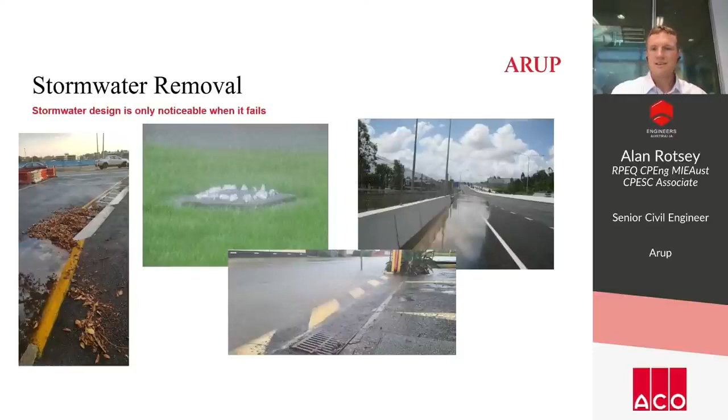You can design for your set storm, and then if the storm gets bigger than that, it'll fail. You can have additional blockage. So just because something looks broken doesn't mean it's not doing exactly what it's meant to do. Some things are unfortunately meant to flood.

So the traditional way of looking at stormwater, if we take it back to basics, we are looking to get water away from where it's currently falling, be that a road or a pedestrian area. So in a wide open space on a new road, we can just let that water sheet flow over the edge and away. We don't need to think about it any more than that. As areas get more built up and urbanized, you may need to capture that water as it flows off the road in a grass swale. That's the simplest and most basic form of getting drainage away after it's landed.

As areas get more constrained beyond that, you might need to put a hard-lined swale in that resists the erosion that might happen, lets you concentrate the stormwater and move it away more quickly. There's a number of other ways you can get drainage away, but that is the basic, cheapest, simplest way to do it. And then when you move on beyond that, because things are more urbanized, you want to put a footpath next to the road, you need that next traditional drainage, pits and pipes.

These are used everywhere in urban spaces where space is at more of a premium. And in their basic form, you put a kerb and channel at the edge of the road, you let the flow go across to the channel and build up. Once there's too much flow at the edge of the channel, we put a pit in and let it flow into a pipe and away underground. And that works just fine.

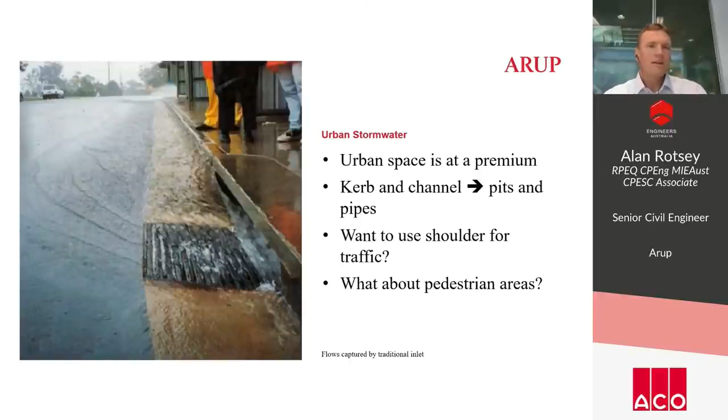So the solution to that is continuous capture drainage. There are a few different ways this can happen. You can use a trench drain, which is what it says on the tin - it's a trench in the surface of the land with a grate over it. The water can go into that as soon as it gets there and flows away.

Slot drains in the middle there - a pipe just below the surface with a vertical slot to let the flow go into it. Again, minimizes flow width on the surface and the flow can get away. Or a combined kerb drainage, which is a hollow curb with holes in it - water can get into the curb and disappear that way. So these are all similar but different in what they do.

They all have their benefits and their limitations. The slot in a slot drain can limit the inflow of water into the pipe - it's quite easy for that to get blocked. Grated trench drains, I think everyone is familiar with.

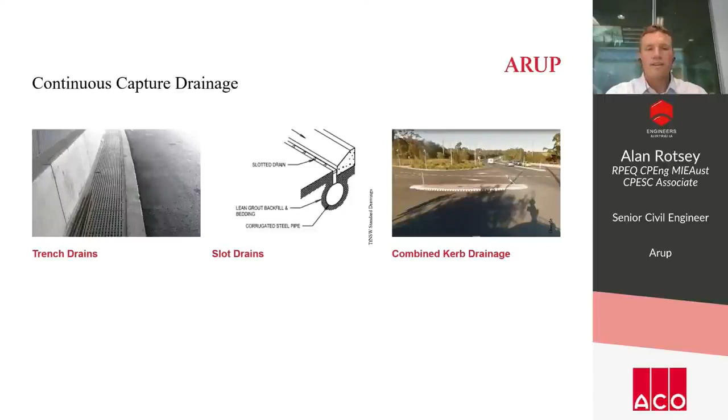But if we put these in poorly designed, poorly thought out scenarios, we run the risk of them not operating effectively. So we have pros and cons. As I alluded to a moment ago, there's little to no flow width on the surface using them. We don't need to excavate much because they are very shallow, and they're very unobtrusive when well incorporated with the overall design.

So they can be used all over the place, but they do have issues. The principal one is that they can fill up with silt, which means they need a lot more maintenance. And if they're not maintained, then they don't work - they may as well not be there. So we need to design to minimize that maintenance need.

Water - the first rule of drainage is that it flows downhill. So you still need to get the water to flow downhill. If you put a trench on with zero grade, water will flow in and it will build up and flow away, but it will do it so slowly that it's going to fill up with silt. So you've shot yourself in the foot.

The grates above trench drains can be prone to blockage, which will limit their capture rate. And that's more of an issue as you get to pedestrian areas - you need to let flows in, but not have high heels get stuck in the grating. Then you have a grate that's small enough to stop the high heels, which means it will stop and capture more litter and debris, which will block the grate.

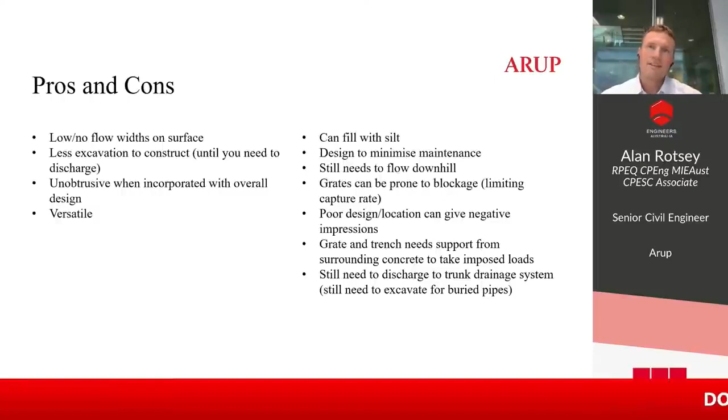Obviously, if you put them in the wrong location, they can give a negative impression. Then we go, what is the purpose of this? What were they thinking?

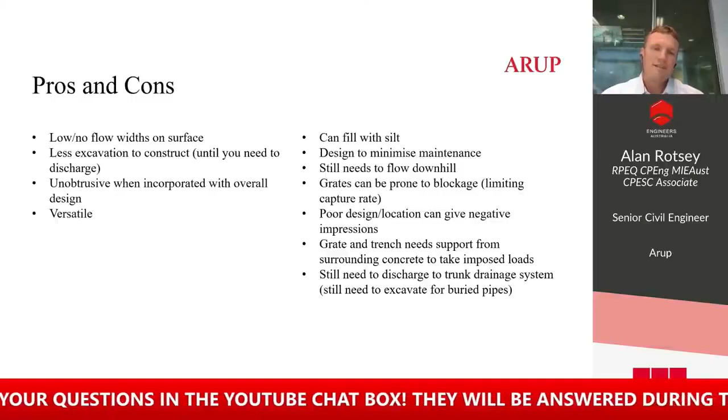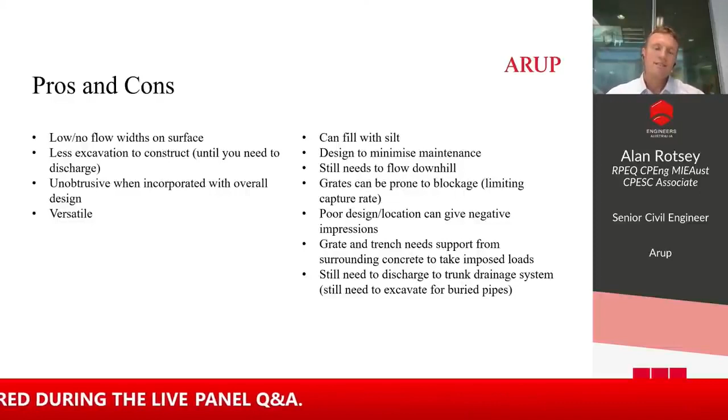The grate and trench obviously need support as well, so you need to make sure it's properly incorporated and constructed. And lastly, although we said in the pros they need less excavation, eventually you still need to get the water that's in them out and into a buried pipe somewhere. It doesn't just magically disappear - you've got to get that away.

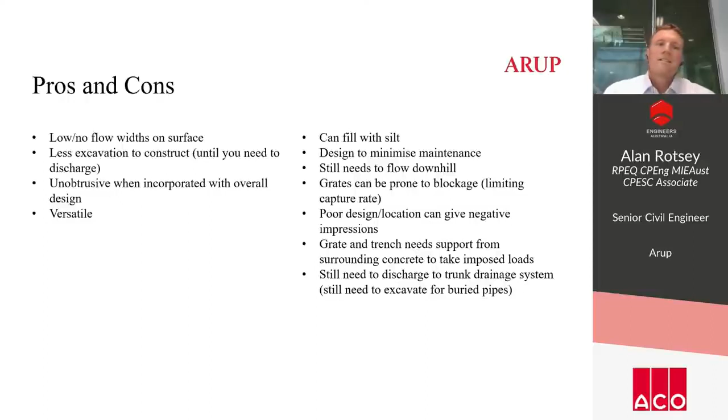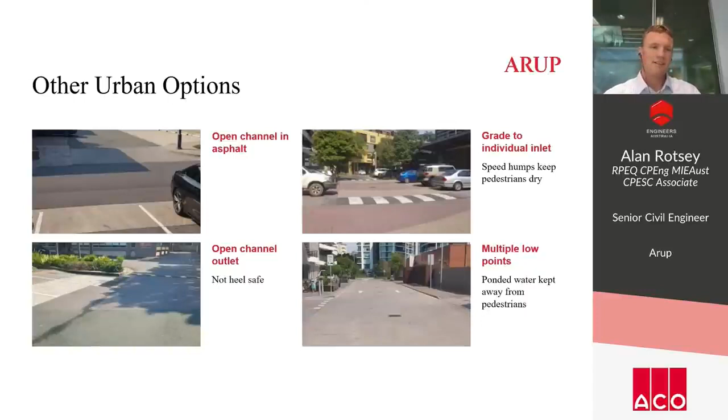An open channel is great, but you still need to get the water away. That's a very un-heel-safe grate - it's huge, but that's an area prone to flooding, so they needed a big inlet to get the water away.

As I said, for all of those, you need to get water into an area and stop it, allow it to pond. If it doesn't pond, it will struggle to get into the grating. So in pedestrian areas, check your grating capacity, especially allowing for blockage and the surface gradient. If you design something with no gradient, at 0, it's okay in theory - it'll build up and flow away. But construction tolerance means you'll end up with ponds everywhere, as you get little depressions - they can't build a perfectly flat surface, and even if they managed it, the land will settle. So adding a small amount of crossfall will let the water get away without ponding.

So ponding depth, as I mentioned, it's good for capture. The more the water will pond up, it'll increase the amount of flow that can get into any inlet. But you can only really allow that to happen away from where pedestrians are going to be walking.

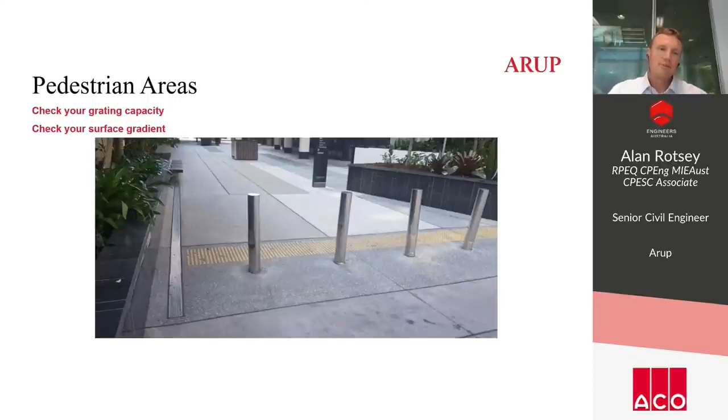We can include a blockage factor, which allows for debris getting in. We can also allow for blockage caused by the actual grate itself. So a heel-safe grate can close your opening up by 60 to 70% from just a basic hole. And we can use that. Blockage factors - generally we use 50% for sag inlets, but if there is a lot of debris around, when you consider it there's a higher chance things will block, then you may need to use more than 50%.

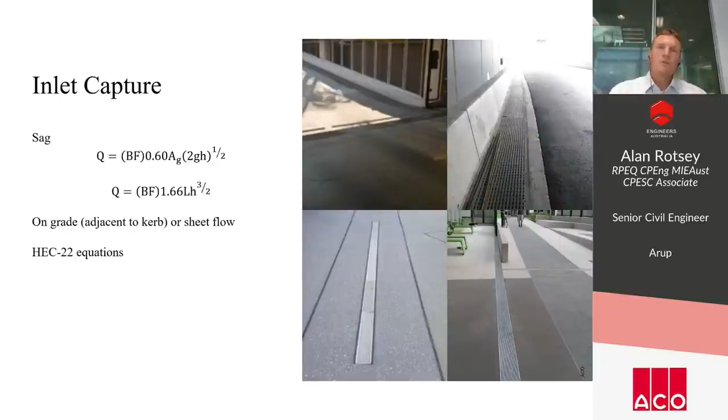The flow in the channel is non-uniform, because as you go further down the channel, more flow will get into it. But to do a quick check - is my trench going to work, or do I need to step back and have another think - we can use Manning's open channel equation to work out how quickly the water is flowing. If you use Manning's open channel for a flat trench, on grade at 0, velocity will be 0, it won't work. That is the limitation of the equation.

Obviously the water will flow away, but you'll need to work out how to get rid of the sediment that it leaves behind. A better option is to slope the trench, either by sloping the ground or adjusting the invert of the trench as you go along it. That will give you some gradient, which will increase the velocity and, again, help move the sediment, get rid of it.

There is obviously an issue with that. The top of that trench had no flow, means no hydraulic radius, no velocity. So the sediment will build up. Once the sediment starts to settle out, it will increase the roughness, which will slow the flow more, which will help more sediment settle - it's a bit of a vicious cycle.

The solution to that, if you can do it, and here's where you need to think more carefully about how you're designing - is there a way you can have some water build up on the surface before you start your trench? Or is there a way you can put water into the trench below ground from a roof water downpipe, for example, to add that kick right at the start so that you have sufficient velocity in a small storm at the start of your trench that the sediment won't settle out.

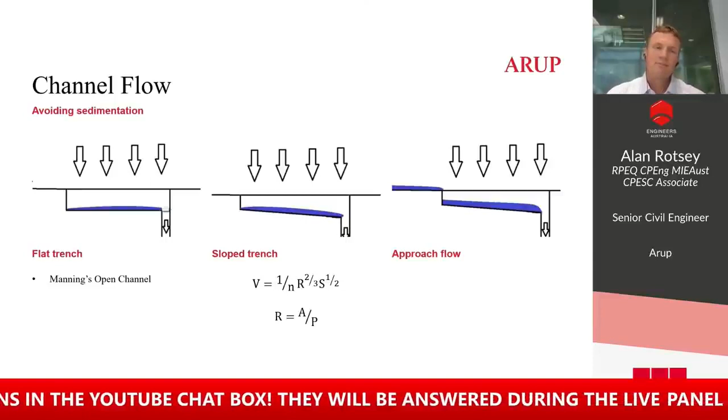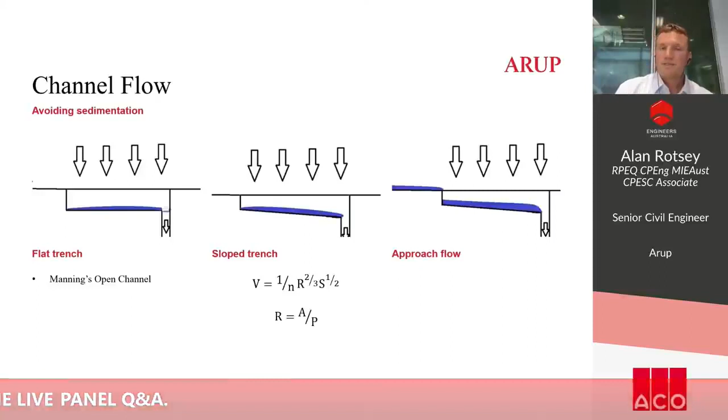Beyond that, there are other options you can think about to improve velocities and stop sediment settling. Don't pick the widest trench possible and keep it shallow. If you pick a deeper, narrower trench, the water will flow more quickly. Obviously, when you get to a certain size, you will need a bigger trench.

Directing overland flow - if we can get overland flow into the start of the trench, even if the flow is bad and it's going to cause a problem right at the start, the benefit to the client might be that you won't need to get out and dig dirt from the trench every time it rains, or before every time it rains, which is more of an issue.

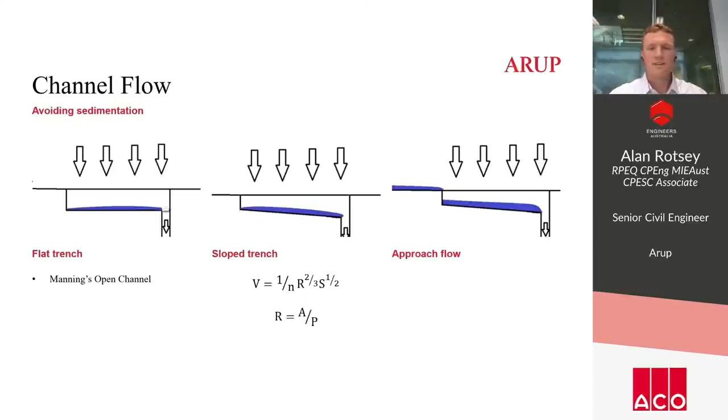Capacity of a channel is not just to do with the areas we've talked about, the amount of flow in it, the gradient, the width. If it's poorly constructed, both in the channel or in the carrier pipe when you discharge, it's not going to work. It's going to slow down.

Other things you can use to improve velocities: egg-shaped inverts to a channel, or a V-shape, will concentrate the smaller flows, and that will increase your velocity and allow sediment to be transported away.

The difference between flow capacity and self-cleansing velocity is a delicate balancing act. If you want to design your trench to work in the 1 in 100 year storm, or the 1% storm, or any significant storm event, then in the smaller 1 year or smaller storms you use to check for self-cleansing velocities, there won't be flow getting into it and it's going to fail. Thankfully, mostly trench drains, especially in pedestrian areas, won't be designed for anything like that large event, and that should help with the balancing act.

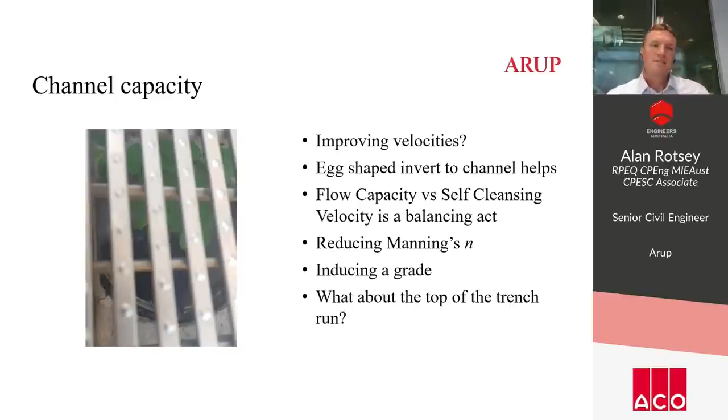Other things you can do which will improve channel capacity is to reduce the roughness. The smoother the channel, the more easily water will flow and sediment will move. Adding grade - we talked about slope channels, we talked about sloping the surface. Potentially you need to do both at the top of the channel, so you have a sloped channel on a sloped surface. These are all little tricks you can use to get your channel capacity higher and make it work better.

And if you assume it's designed to capture flows in a 10% AEP event, that's around 10 liters a second, 17 liters a second in your 1% event, but only 5 liters per second in a 1 exceedance per year event that you'd use for self-cleansing velocities. That's all using ballpark figures. Obviously, you would need to check your actual rainfall intensities if you were designing this.

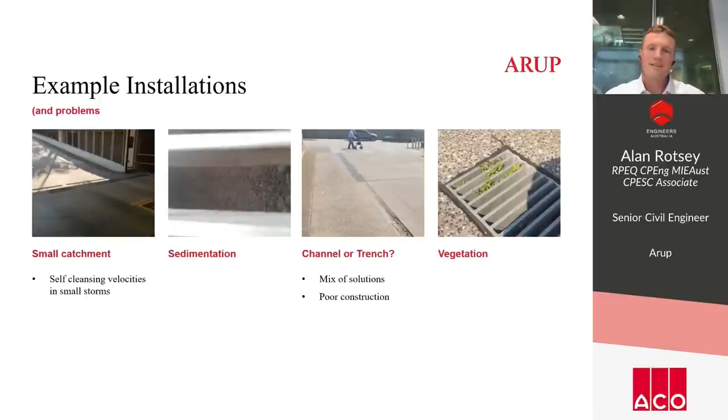Then clients get put off. They don't want to put things in that they believe are maintenance headaches, and you need to then work very hard to demonstrate they're not maintenance headaches.

And the more things that are put in poorly thought out, poorly designed locations, the more they will be resistant to using them where they can be used.

So moving on, we've got our water in the trench. We've made sure the trench is big enough to take the flow and small enough to move the sediment along. The next thing we have to do is get the water back out of the trench. When you stop and look into this, it quite often controls the overall capacity of the trench.

There's a few ways you can do it. One option, shown in the photo on the left, is the trench goes into a pipe, and the pipe can then go to a pit or away elsewhere. That pipe is smaller than the trench. You've got losses getting into it, so it's going to cause the flow to back up, which is why in this instance the trench has been made a little deeper just approaching the pipe, to give some extra headwater.

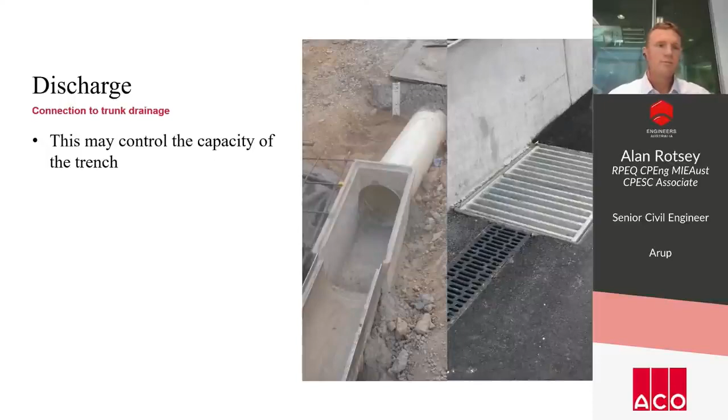The second option is to punch it straight into the side of the pit, as you can see in the photo on the right. That's a normal road pit. You can use any sort of pit as long as it's designed to have that hole cut out in the wall. The third option is to drop things vertically.

So these are a quick high-level calculation to see how things are going to work. I treated the outlets that were pipes going horizontally as small culverts, and then I treated the flow in the channel. I gave it a 0.5% grade and used Manning's open channel equation to find the capacity of the channel and the capacity of the culvert. The headwater for the culvert needs to match what the flow would be in the channel, at the same depth. Otherwise, when you put your outlet, your full channel will back up and overtop.

I tried it in a 200 mil channel and a 300 mil channel. In both instances, you had to drop your channel, make it deeper, to get capacity to let that flow exit the channel into the main drainage system.

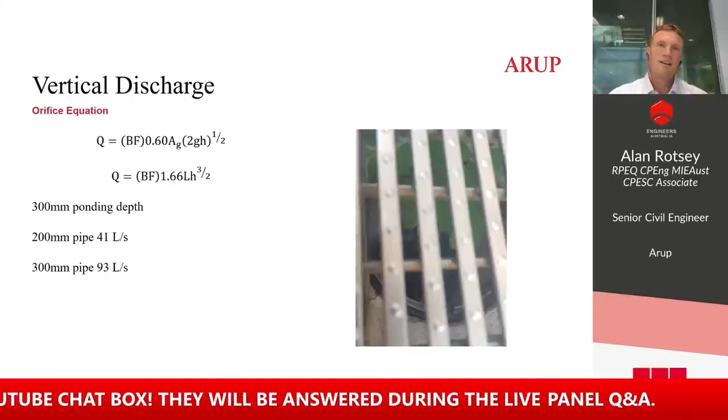The other option, as I said, is vertical discharge, so we're not looking at this as a culvert anymore. If you're just punching into the side of a pit, the discharge issue goes away quite quickly because it will flow like a weir out of the pipe, out of the trench, and then out of the pit in a normal way. The pit will be deeper, so it's doing exactly what we were trying to mimic with the short, deep section of trench—it lets the water build up and go away in the pipe.

If you're discharging vertically, it's another equation, the orifice equation. This can cause problems because you have potentially flows coming from both sides, but the orifice equation, the top one of the two, can be used to calculate how much flow will get in given your depth of channel. If the approaching flow is smaller, then the weir equation below that will be more applicable. You look at both of these, and to be conservative, make sure we've got this correct, we pick the smaller of the two discharges.

So given a 300 mil ponding depth, if your vertical pipe is 200 mil, you'll get 41 liters per second discharging through it. If your pipe is 300, you'll get 93. Obviously, the larger pipe has a much better discharge. So you may need to deepen the section approaching your discharge point, especially if the ground is getting flatter. You can do that by sloping your invert or just having a section of deeper pipe.

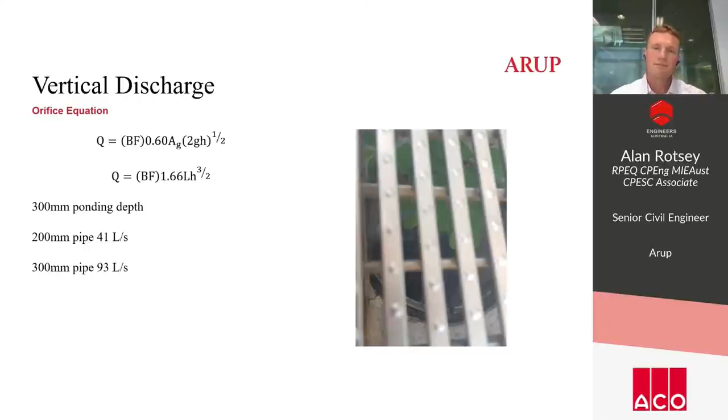If you start thinking about this from a water quality perspective, people get upset that we put in a gross pollutant trap. It's a nightmare, it fills up with sediment. But that's the purpose, sediment will be there. Either we need to pass it downstream to somewhere else, or we need to capture it. You can't just keep passing it downstream into water bodies, so it does need to get captured somewhere, but the trench drain is probably not the correct place to capture it. So think of some other solutions to get rid of it.

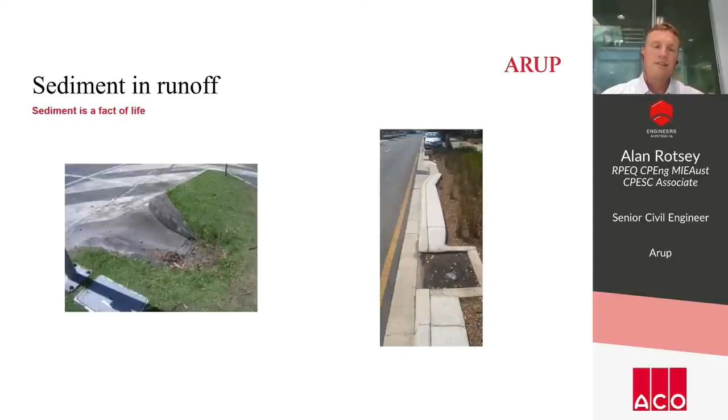In conclusion, trench drainage is a good solution if well thought out. If you give a stormwater designer a completed master plan of a car park or pedestrian area and say 'now drain it,' you're likely to get poor solutions unless the person designing the surface has thought through where the water is going to go. Can we corral the water into a certain location?

In this photo, there's an open V channel. This is the car park I used at the start. That water from the driveway on the right can't get there—it's being put into a trench, potentially because of a development application constraint. But logically, that water should have just bypassed the trench, got into the channel, and away that way.

You can't design this as a one-man band. You need to work with everyone else to get an integrated design, or it's going to fail.

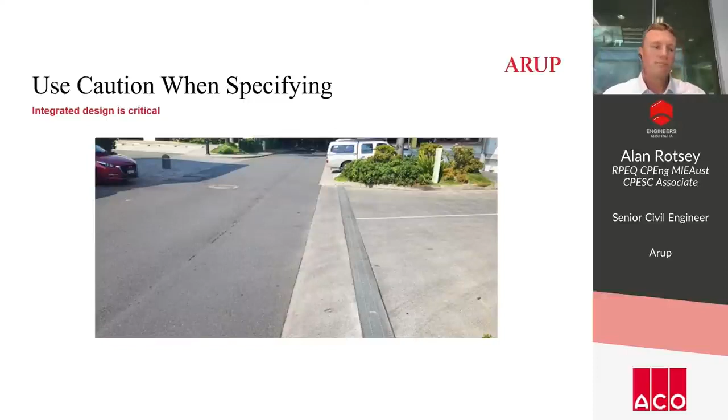And that's the end for me, if there are any questions.

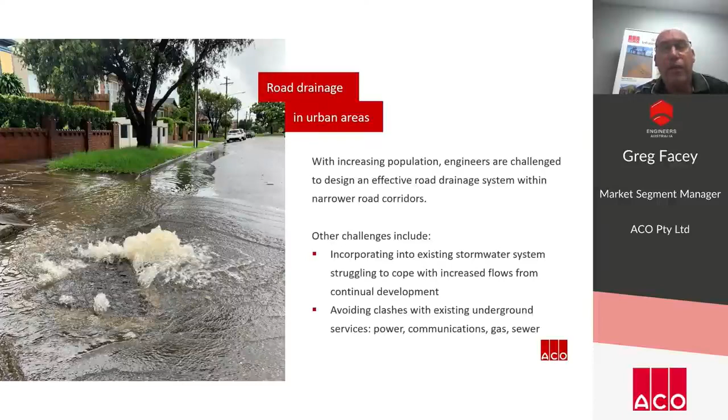So let's begin with surface drainage for roads. Looking at modern drainage designs, we have a lot of challenges from our growing population. As our population grows and cities become more densely populated, engineers are being tasked with designing effective road networks and integrating drains and other services into narrower and narrower road corridors, either to widen or reconfigure existing roads or extend or add lanes for turning bays at intersections. Beyond just trying to fit more into a small space, other challenges include connecting to an existing stormwater system that can't cope with increased flows from continual development, and trying to avoid clashes with underground services.

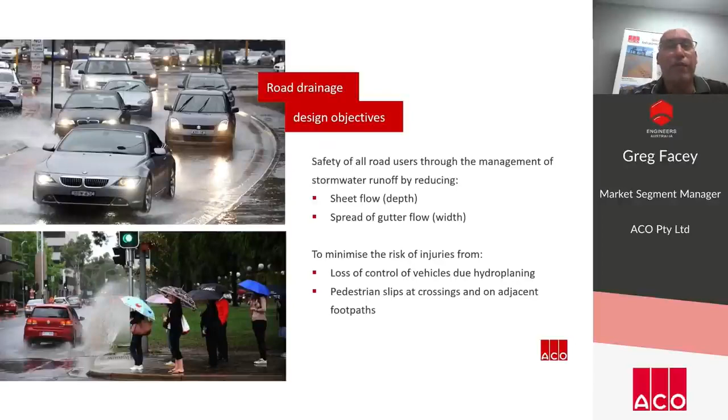The primary objective of road drainage is to ensure safety for all road users, whether motorists, pedestrians or cyclists, by reducing the depth and width of flow on a project. Managing and reducing or eliminating sheet flow and the spread of gutter flow will minimise the risk of hydroplaning and vehicles losing control, as well as slips, trips and falls from pedestrians.

Surface runoff on roads is collected and channeled along kerbs and gutters and along medians on super-elevated roads. Inlet structures are used to capture the surface water and transfer it to an underground pipe system. This could be at a low sag point to prevent ponding on grades before the water depth, width and velocity becomes a hazard to users, or at approaches to intersections, upstream of pedestrian crossings, and also at bus stops where people tend to congregate.

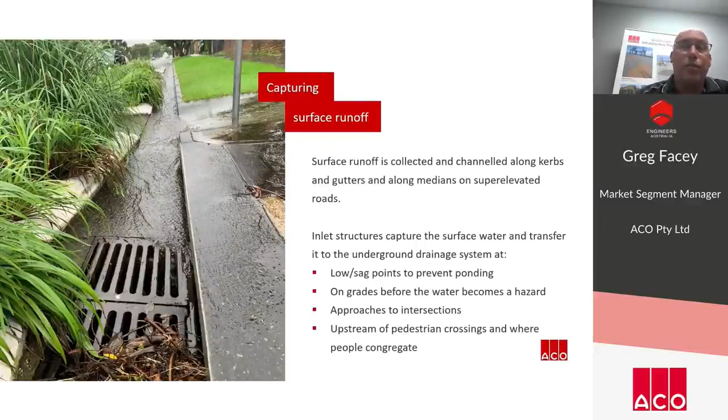There are three different traditional types of drainage inlets available: either side entry inlets through the openings of the kerb face, grated gully pits which are positioned in the gutter through the grate, or a combination of the two with an extended side entry.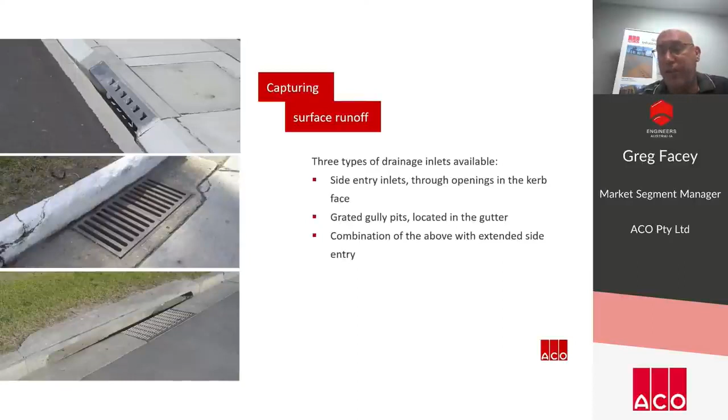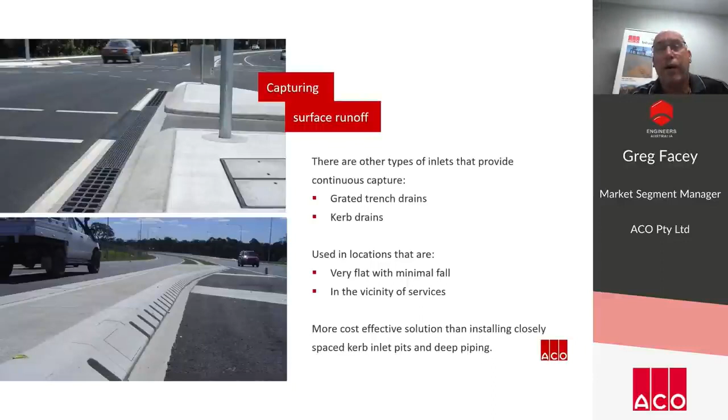But you can also capture water continuously rather than intermittently using grated trench drains or kerb drains. These are used in areas that are traditionally very flat with minimal fall, or have services in the ground close to the surface. These continuous capture systems are more cost-effective solutions than installing closely spaced kerb inlet pits and deep pipework. We'll have a look at that in more detail later on.

Austroads released the Guide to Road Design, Drainage Section, in 2013, written with a consortium of all state road authorities. Since this document was published, continuous capture inlet systems have become a more accepted method of draining road pavements in certain applications.

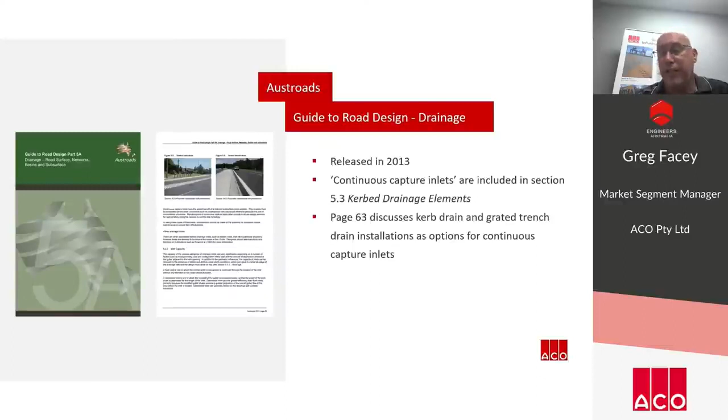So now let's focus on continuous capture inlet systems. Grated trench drainage is one type, and due to rainfall variance in Australia, we tend to see 200 or 300 wide channels commonly specified, as they are compact with variable depths to ensure runoff is discharged efficiently. There are generally three types of grates: a high flow with large aperture configuration, a heel-safe design for pedestrian safety, and transverse slotted grates.

Grated trench drains must be load rated to AS 3996 Class D, and preferably fitted with a boltless locking mechanism, which allows quick access for maintenance to clean out the trench drain from time to time.

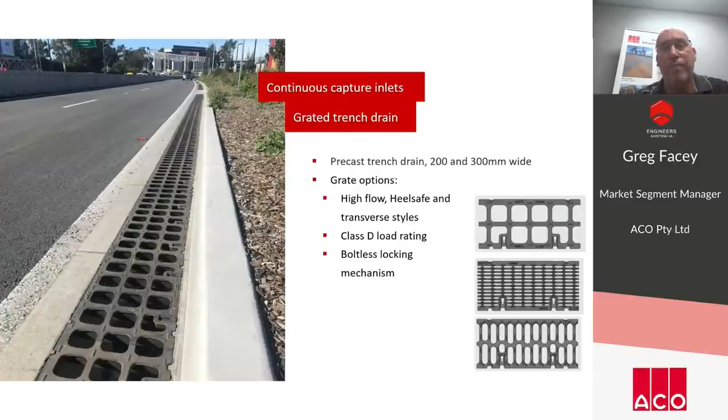Precast polymer concrete channels have a very smooth surface and are available with built-in slopes to further improve hydraulic capacity to remove water effectively from flat areas.

Hydraulically, with a V-shaped channel profile, the channel creates a higher velocity during low flows compared to a U-shaped channel, or even worse, a flat base channel. This is due to the narrower V-shape at the bottom third of the channel, which creates higher velocities to promote self-cleansing, helping keep the channel clear of debris and silt build-up, ready for the next storm event.

In precast channels, the V-shaped profile creates deep pockets in the sidewalls of the channel, which allows the concrete encasement to mechanically key in and around the channel for a strong installation. They also have wide ribs to give the channel additional strength, which makes them ideal for these dynamic applications.

Channels with ductile iron edge rails, rather than steel edge rails, provide a more durable solution. Edge rails with features such as anti-shunt lugs prevent longitudinal movement of the grates, and also shock absorbing widgets help reduce noise from vehicles traversing over the grate, so you don't get that clunking noise.

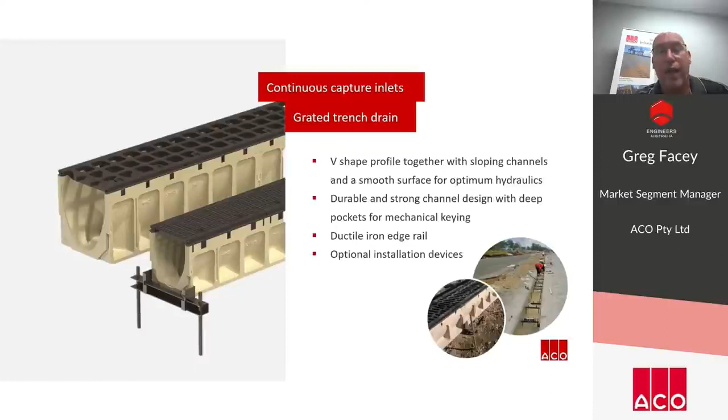There are a number of different ways to install precast channels. One way is to use installation devices, which clamp the connecting channels together to prevent movement, and also stop the channel floating during the concrete pour. They also make installation quick and easy by reducing formwork and allowing installation with a single concrete pour, making it much more cost effective and a stronger installation.

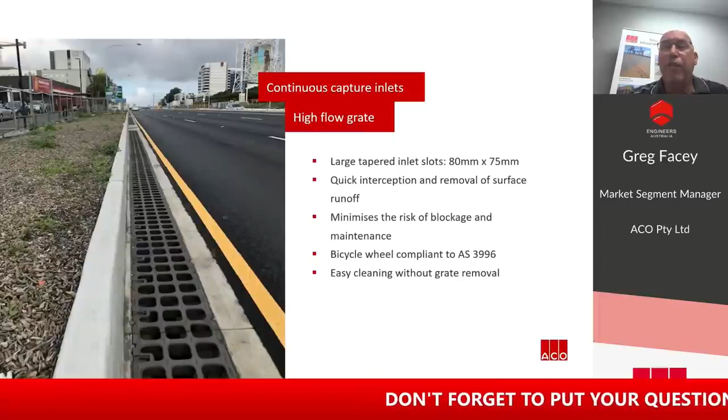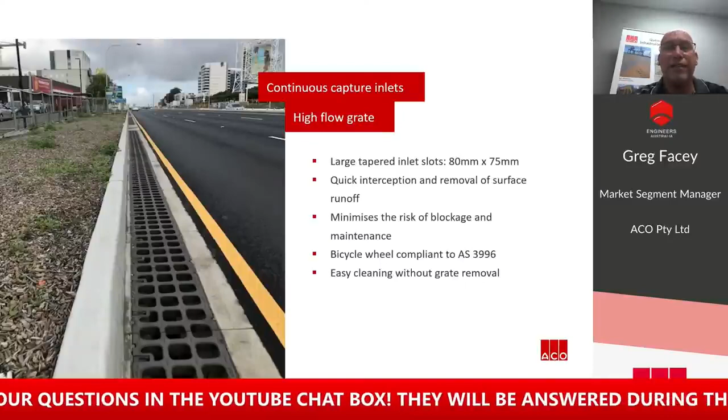High flow grates have large high capacity tapered inlet slots that are 80 by 75 mil, and each of these allows the runoff to be quickly intercepted and removed from the surface. These large intakes also minimise the risk of grates blocking up and creating hazards to motorists with flow spreading into the traffic lane. Even though these grates have large inlet apertures, they are bicycle compliant to AS 3996, meaning bike tyres won't get stuck in the grate, injuring a cyclist.

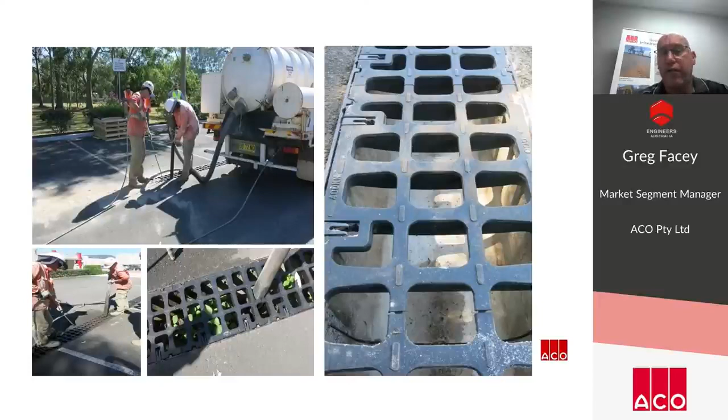These high flow grates have such large apertures that they allow the channel to be cleaned without the grate having to be removed. A sucker truck with a high pressure washer is used to break up the sediment and wash it down to the vacuum pump, which sucks up all the suspended silt into the truck. This can all be done without unlocking or removing any of the grates in the traffic carriageway, allowing quick maintenance of the system.

The next continuous capture inlet system I'd like to share with you is the curb drain. This is a great product as it combines two functions, a drainage system with the curb itself. It's a really shallow solution which requires less excavation for installation, and therefore is less likely to have clashes with any existing services.

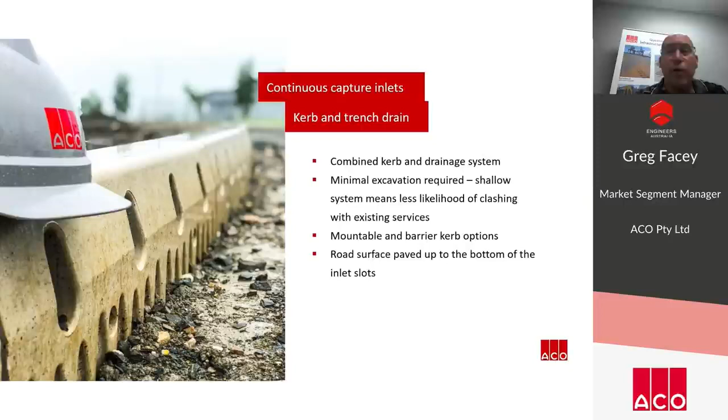Options include semi-mountable and barrier type curb profiles, depending on the specific area of the roadway. There are 100 mil wide curb drains ideal for minor roads in council areas, a good compact size for minor catchments. The 200 mil wide curb drains are for major roads and larger catchments. Semi-mountable curb drains are used predominantly in medians, and the barrier curb, a non-mountable option, is used adjacent to footpaths to stop vehicles from mounting the curb. Access units are generally required at regular intervals, say every 20 or 30 metres, to provide access for cleaning and maintenance. Precast curb channels are encased in concrete and tested to AS 3996 Class D loads.

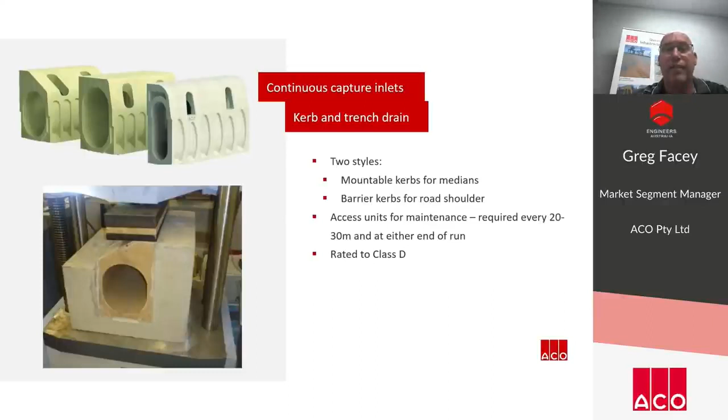Here I'm just going to quickly run through some installation examples where graded trench drains and curb drains have been used along different parts of roads and highways.

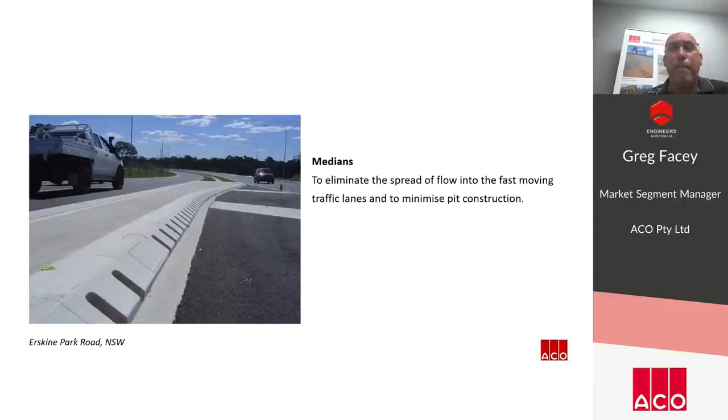For medians, they might be used to eliminate the spread of gutter flow into the traffic lanes by continuously capturing the water rather than traditional pit and pipe construction. A curb drain is a smaller system, so depending on the hydraulic capacity requirements of the project, wider and deeper graded trench drains might be a better option.

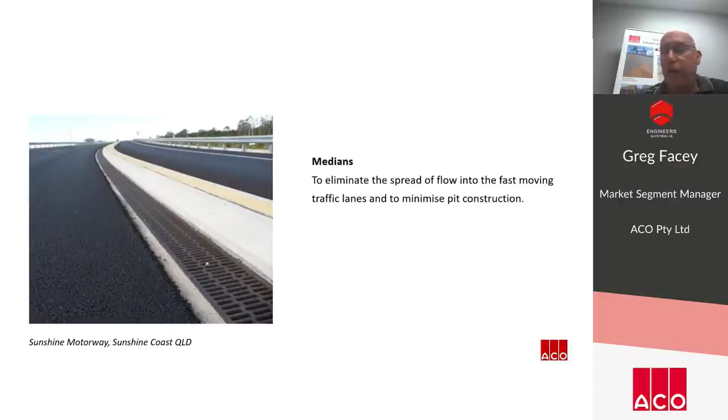For right-hand turn bays, where we're trying to fit more lanes into a smaller area, curb drains can be a fantastic solution to give as much space to the roadway as possible. Some engineers and road authorities may prefer graded trench drains to curb drains for this application.

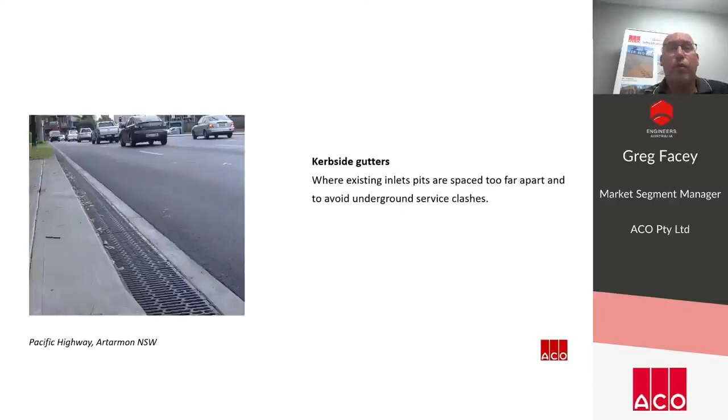In curbside gutters where existing inlet pits are spaced too far apart, resulting in a hazardous spread flow, curb drain can be used continuously to capture the gutter flow and minimise risk to motorists. Or again, a graded trench drain solution can be used in this application as well.

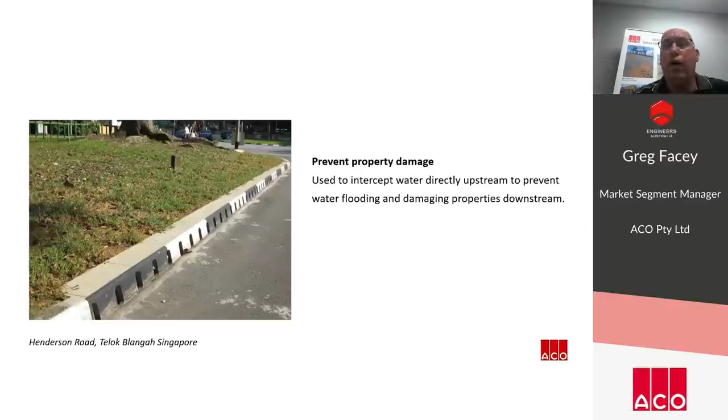With all surface water management, we're trying to prevent damage to property and people, and curb drain can be used to intercept water upstream of lower lying properties. Likewise, graded trench drains can also be used.

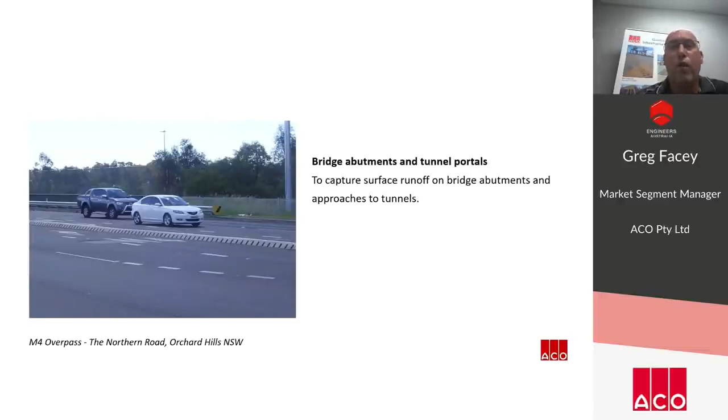Also on bridge abutments and tunnel portals, you can use curb drains or a grated trench drain as a solution. They're quite versatile products.

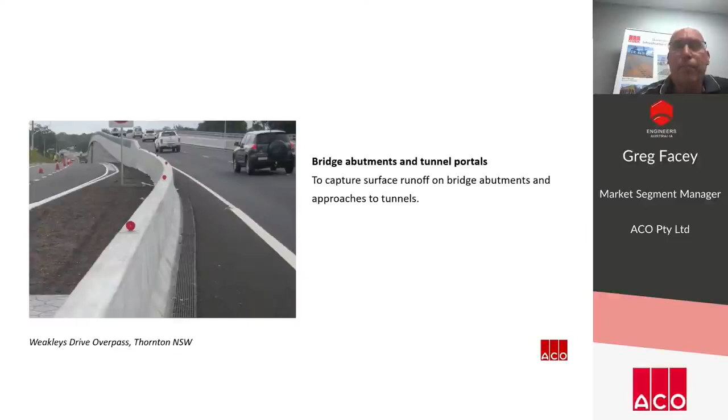They can also be used on bus stops and railway interchanges because they have a lot of pedestrian use, and we don't want anyone to get splashed by motorists. So again, we can use curb drains to get the water off the road quickly, or a grated trench drain can also perform the same function.

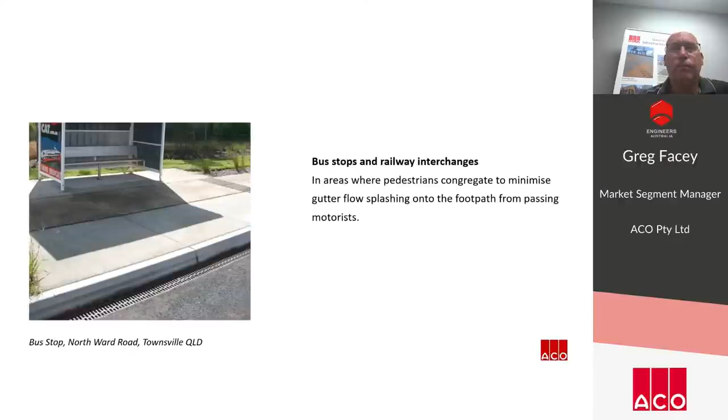One of the big drivers on every project, as we know, is cost. Precast curb drains and grated trench drains are ideal applications where curb inlet pits would otherwise be spaced closer together, say at intervals of 20 metres or less. It's more expensive to install pit and pipe in these applications than a grated trench drain.

Here's an example of a road project where the designers opted for closely spaced pits and pipe, where a continuous capture inlet system would have been a more cost effective solution.

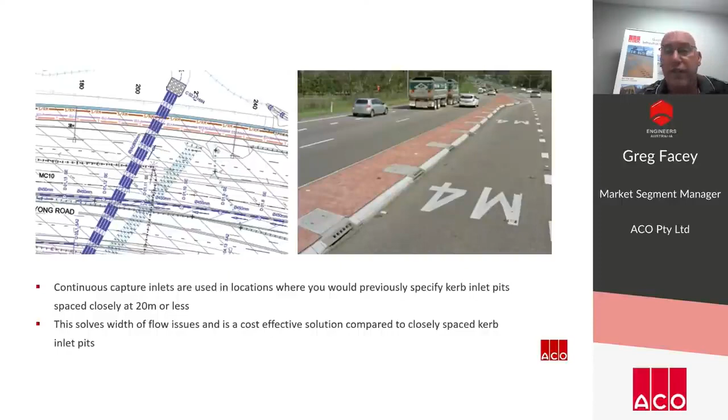We actually carried out an install cost analysis of a curb inlet and pipe system compared to a precast grated trench drain and curb drain system. The outcome was a grated trench drain was 15% cheaper than pit and pipe, and the curb drain was 36% cheaper. So really quite significant savings there.

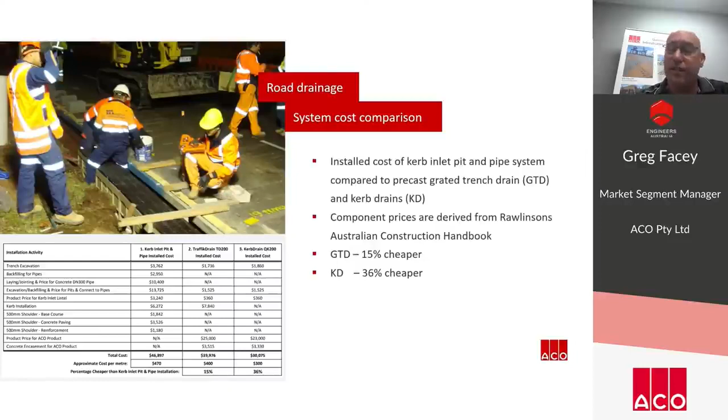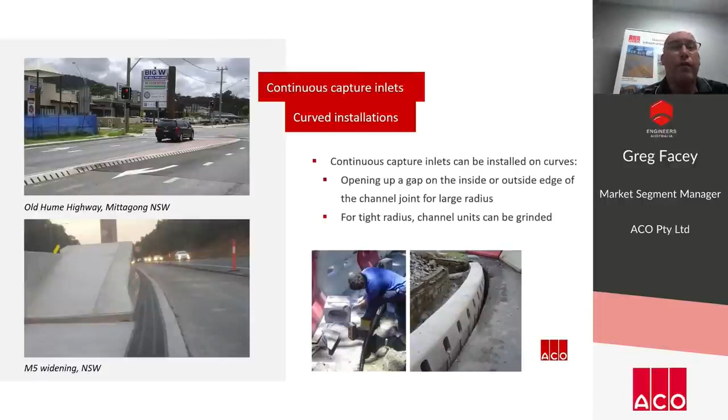Finally, for road drainage design, precast channels can be installed on curves. This can be done by opening up a gap either on the inside or outside edge of the channel for gentle curves on a large radius, or by grinding and mitering the channel units on site for tight curves and smaller radiuses.

Here's an example of an intersection widening and upgrade project where Telstra services were clashing with the pit and pipe design. They designed and installed a shallow curve grated trench drain to act as a pipe to move the runoff around the corner and from the intersection to discharge into an existing curb inlet pit, which had the advantage of avoiding clashing with all the existing Telstra infrastructure or the need for costly relocation of these services.

So now let's have a look at shared spaces and the important considerations to correctly specify and integrate a surface drainage system that is safe for both pedestrians and motorists.

Shared spaces are increasingly transforming city centres, transport hubs, and public domains into inviting spaces accessible for all users. Austroads describes a shared zone as an area utilised by both pedestrians and vehicular traffic in which drivers must give way to pedestrians at all times, and where the street environment has been adapted for very low speed vehicles.

Shared zones are normally used in areas of high commercial activity, medium to high density residential areas, or recreational areas. Ideally, shared spaces are located in areas with relatively flat pavements. The surface drainage needs to be designed with an appreciation of the grate slot size, slip resistance, loading, durability, and accessibility for safe passage for both pedestrians and motorists.

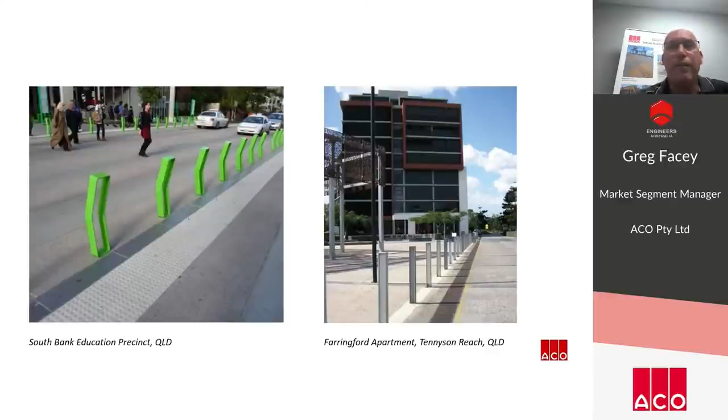And a couple of Queensland examples of a shared space in an education precinct and a medium to high density residential area.

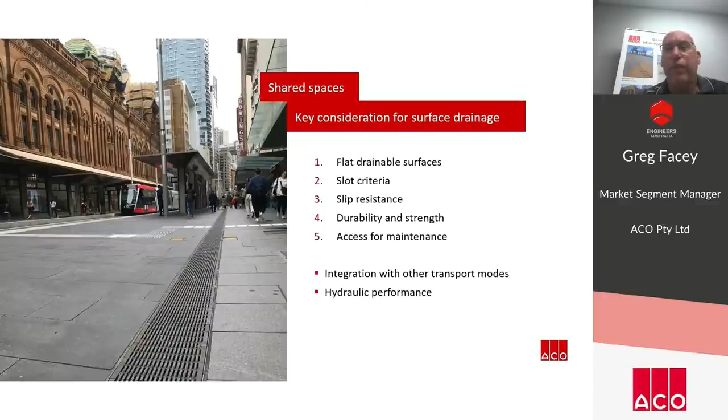Now let's have a look at some of the key factors to consider when designing a drainage system within a shared space. Here are 5 considerations when integrating drains into pavements to achieve those objectives of safety, form and function: flat drainable surfaces, slot criteria, slip resistance, durability and strength, and access for maintenance. Then we'll discuss how drainage in shared spaces integrates with other transport modes, and also hydraulic performance as it's also a critical factor.

Bumpy or steep pedestrian spaces will create trip hazards, particularly for the elderly, children and those with a disability. Surface water management often leads designers to create steep pavements, but they can be designed flat if drainage is properly considered and incorporated during the planning phase.

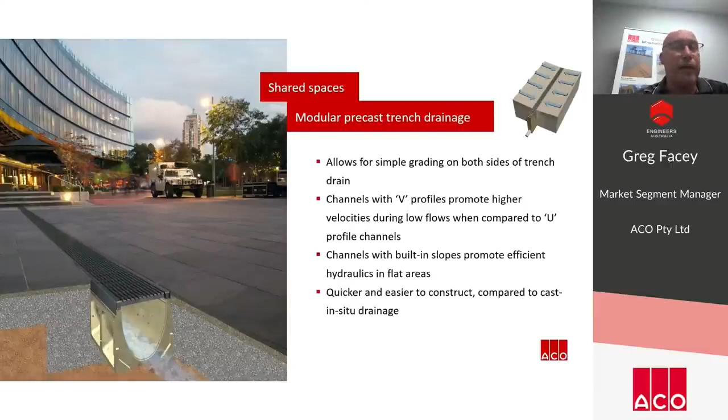Graded trench drainage systems are continuous capture inlets with simple, constant grading on both sides of the drains. As discussed earlier, precast drainage systems with a V-shaped channel profile have hydraulic advantages over U-shaped channels, particularly for low flows with higher velocities. Channels are also available with built-in slopes and an inverted channel providing fall, while the surface and top of the grate remain flat. Precast trench drainage systems are quick and easy to install, particularly compared to cast in situ trench drainage.

The next element to consider is slot sizes, because slot sizes are critical for pedestrian safety and should not hinder accessibility for wheelchairs and walking canes. New building works must be designed to comply with the Disability Discrimination Act, and the DDA makes it against the law for public spaces to be inaccessible for people with a disability. Slot sizes and grates will also determine how safe it is for cyclists and pedestrians wearing high heels or stilettos.

AS 1428.1, Design for access and mobility, was recently revised and released in 2021, and grates in paths of travel shall be in accordance with the following.

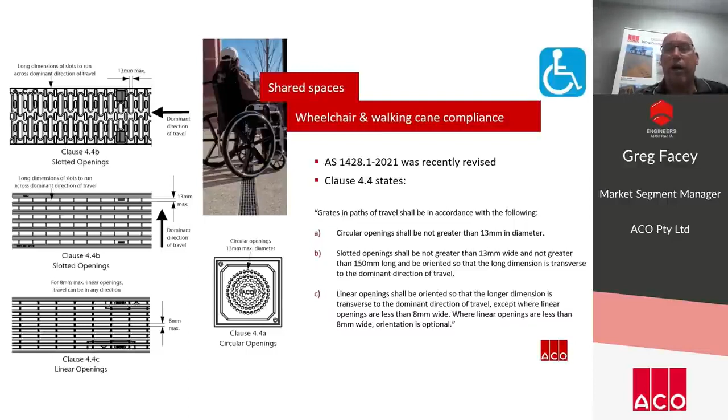Circular openings shall not be greater than 13 mm in diameter. Slotted openings shall not be greater than 13 mm and not greater than 150 mm, and be orientated so that the long dimension is transverse to the dominant direction of travel. Linear openings shall be orientated so the longer dimension is transverse to the dominant direction of travel, except where linear openings are less than 8 mm wide, where orientation is optional.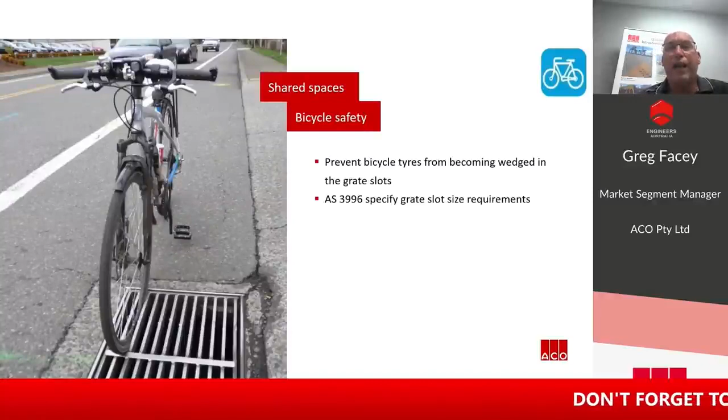We also need to consider bike safety, which is mandated by AS 3996. This takes into account the type of bar used in a grate and also the maximum slot dimensions to stop bicycle tyres getting wedged in the grate.

However, heel safety is the most common complaint from users, and whilst there is no Australian standard for heel safety, there is an American standard that calls for slots less than 8 mm. But there is a trade-off here between hydraulic intake and heel safety. We don't want to see very narrow gaps, because whilst they are heel safe, they don't actually take the water away. As a result, we tend to use a guideline of 10 mm. And as we know, there have been some famous people over the years pictured getting their heels stuck in some grates.

Slip resistance is becoming a massive concern for the Australian design community, and with litigation around these areas, the pressure is placed on the specifier to correctly specify all floor materials, including to the standards. In Australia, in comparison to the world, we have a strong standard with AS 4586, with a supporting handbook, HB 198, which stipulates the minimum slip resistance ratings for a variety of applications.

AS 4586 outlines the test methodologies to simulate different applications as a means to assess the slip resistance of a grate. For grates, there are three main tests. The first is the oil wet ramp test, for applications in industrial and commercial environments where there's likely to be oil on the floor, for example commercial kitchens, with a rating from R9 to R13, with R13 being the highest.

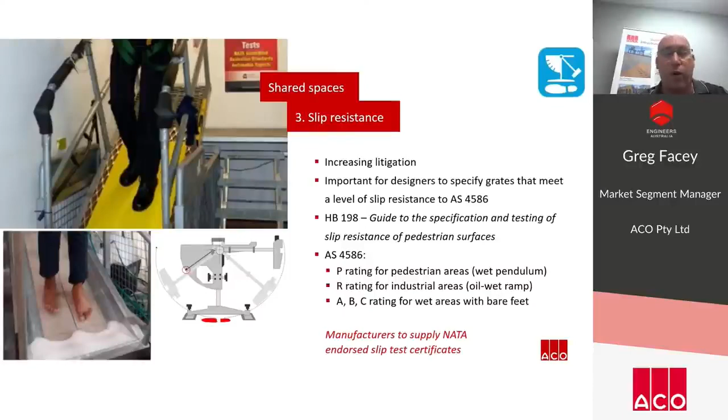Next is loading, and considering the anticipated vehicle loads that a drain will be subjected to is critical, because underestimating this can lead to product failures, and overestimating it just adds more cost to the overall project. So it's an important design consideration. Load isn't just related to the physical load of the vehicle. We also have to consider the type and speed of the vehicle, the wheel load, how the vehicle will move on the grate, and the number of movements.

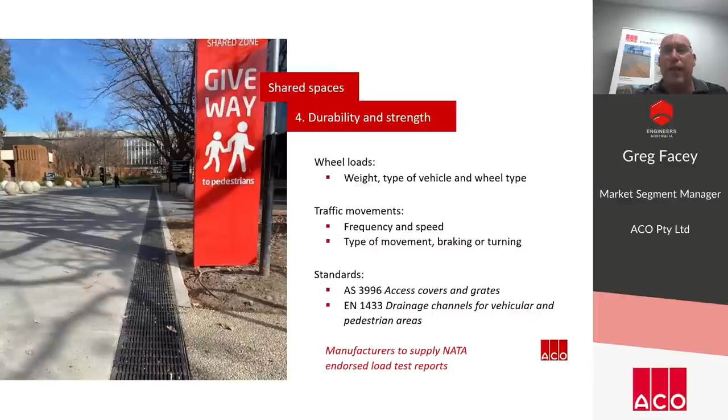There are also a couple of standards you need to be aware of when it comes to load classes. AS 3996 is the Australian standard for access covers and grates, and this tells us how to test the load classification of the grate, but doesn't take into account the underlying structure, whether it be a trench drain or a drainage pit. However, EN 1433 is a European standard that tests both together, so it also tests the drainage channel as well.

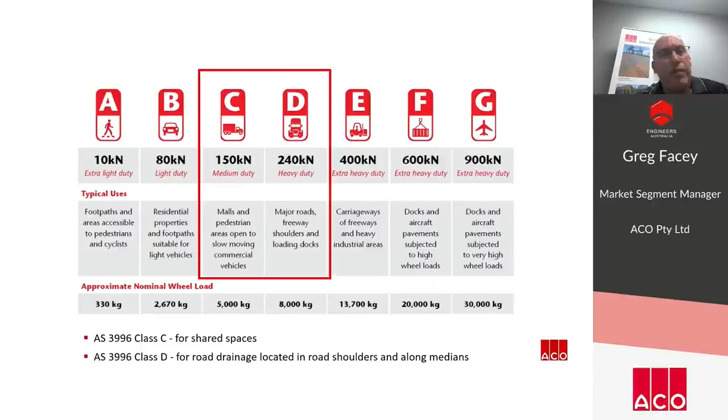This table also looks at load classes specified in AS 3996. It classifies applications from pedestrians, from load class A all the way up to load class G. Shared spaces will fall into load class C, for malls and pedestrian areas open to slow moving traffic. Road drainage needs to be specified as load class D for major roads, freeways, shoulders, and loading docks.

If the grates aren't locked into the channel, it can damage both the channel and the grate. A boltless locking system on grates allows quick and easy fitting and removal for maintenance and cleaning. The other option is bolted grates, but there's a risk of them vibrating loose over time, and it's common that once bolts are removed during maintenance, they aren't replaced, which can be a safety risk for users and road users.

Slot drains require discreet access points that help the designer preserve the visual continuity of the pavement, and access points can be installed at the start or end of every run, every 20 metres or so.

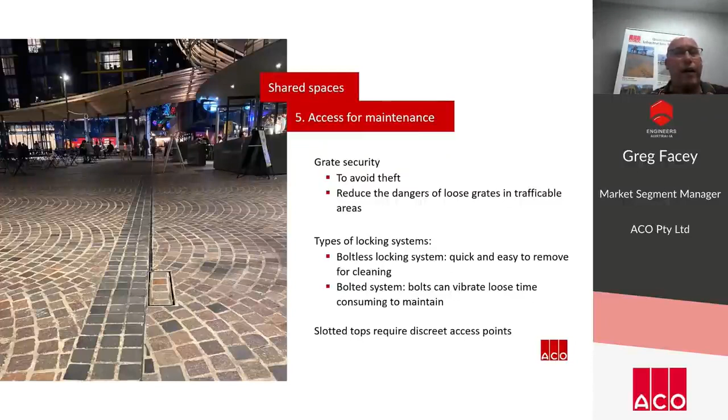State governments all over the country are investing billions of dollars into public transport. New metro lines and light rail projects are connecting communities from their place of residence to city centres, transport hubs, hospitals, tertiary institutions and entertainment precincts, creating shared spaces in and around each of these stations.

Light rail systems have been established in many cities, with new lines constantly being designed and delivered. Light rail is different from metro lines because they run on the surface and are incorporated into shared spaces through high pedestrian traffic areas. So designers are often challenged to provide an effective drainage solution in very flat areas, with the added complexity of draining the track rail grooves.

Specifically designed tram drains discharge the flow from the track rail groove through holes drilled into the rail, into a chute connected to a drain and pipe system. These chutes are made from a rubber material and are also used to isolate any stray current from the tracks, which could otherwise make the grates live and hazardous to pedestrian users.

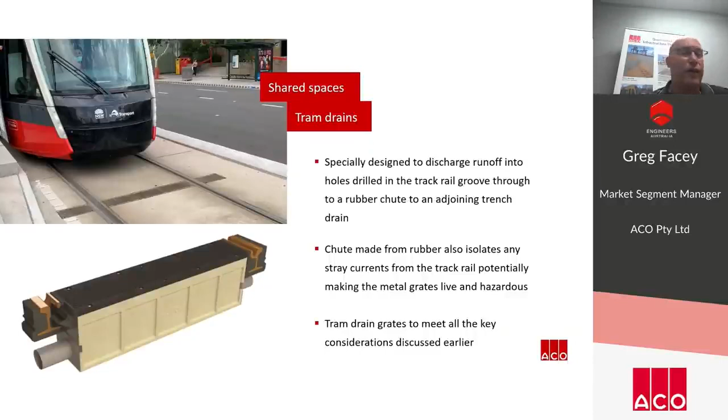Tram drain grates should be designed taking into consideration the five key factors discussed earlier in the presentation. But it's absolutely critical, when selecting a drainage system, to consider the hydraulic performance and whether it will do the job we need it to do.

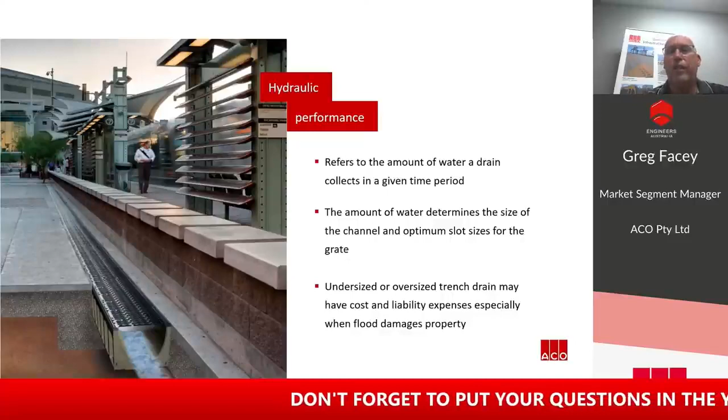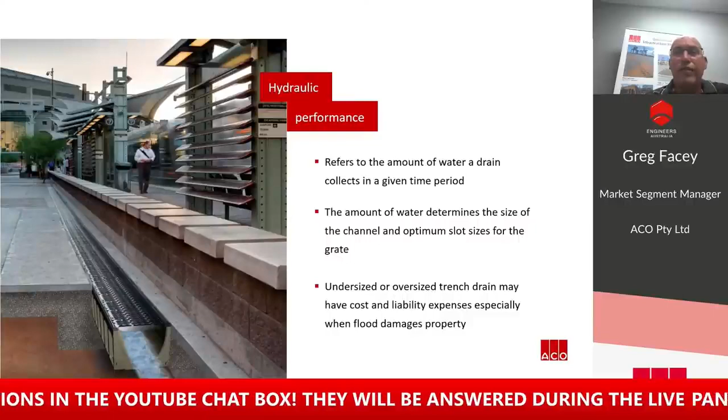Hydraulic performance refers to the amount of water a system can collect in a given time period, and that amount drives product selection, not only for the channel but also the grate, as the grate can in some cases be the restricting factor. Undersized drainage systems can increase the risk of hazards and damage to property if the flow isn't captured correctly, but conversely, an oversized system just adds unnecessary cost to a project.

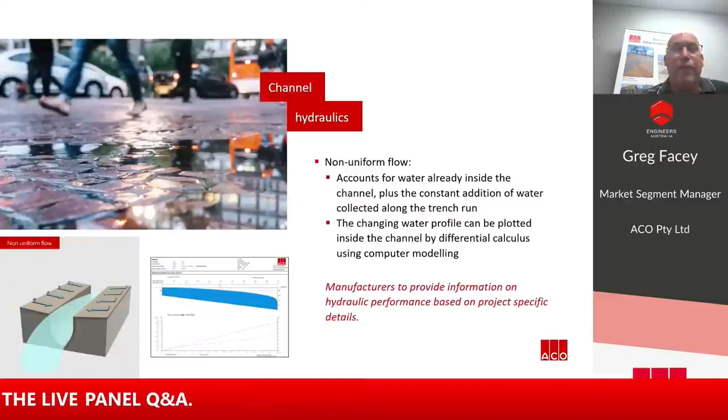So as designers, how do we get that right? If we consider the science behind channel hydraulics, the hydraulics of a trench is quite complicated, and there are many theories and equations to calculate it.

It's common for engineers to use a simple pipe or open channel formula to calculate drainage capacity. However, this assumes the flow in the channel is uniform, which might work for a culvert or pipe where liquid simply moves from one end to the other. But non-uniform flow is a more accurate way to model trench hydraulic performance, particularly as it accounts for the collection of flow along the length of the trench drain, which can be used to plot the changing water profile and depth of the trench drain.

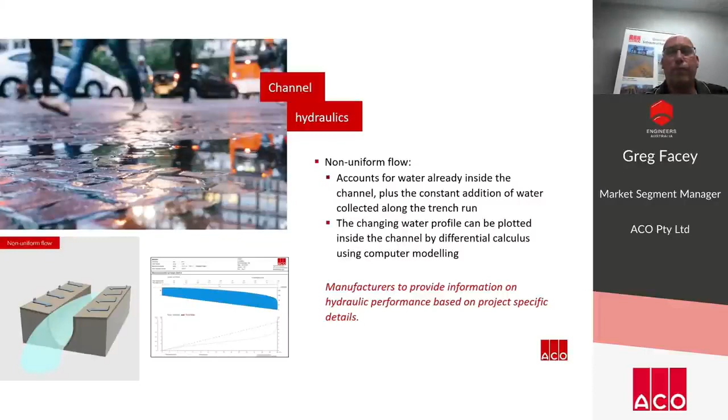Beyond the channel, the grate is also a consideration. Typically the trench drain itself will reach capacity before the grate, but depending on the style of grate, it may not be capable of capturing all of the flow even if the channel is sized correctly.

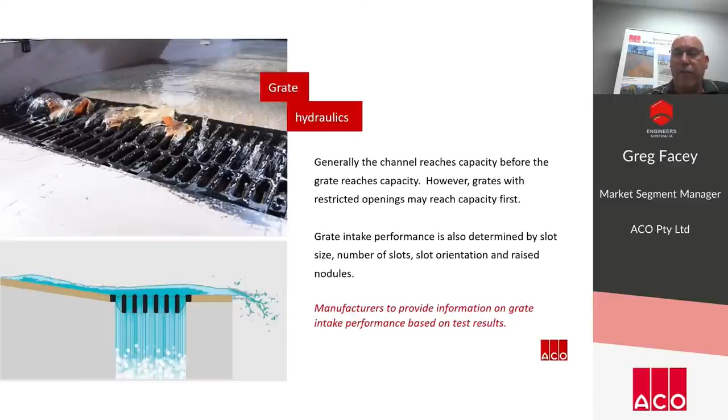ACO Australia was established in the mid-1990s when ACO bought Polycrete as an Australian precast drainage company. Over the years, ACO has expanded beyond polymer concrete production, and we now manufacture stainless steel trench drains, rotationally moulded plastic pits, and mild steel fabrication of access covers, all from our head office in Emu Plains, Western Sydney.

I want to quickly run through ACO's brands. ACO Drain is our range of architectural and commercial linear drainage, manufactured from polymer concrete channels with an array of grates. ACO Infrastructure is our drainage channel specifically for heavy transportation and infrastructure applications. ACO StormBrixx are modular underground stormwater storage tanks for retention, detention and infiltration. And ACO Access is a discrete range of access covers, and Cable Mate is our cable pit and cable ducting range.

Just as important as the products, we can also help you as designers, and ACO can assist you with your next project. We have a do-it-yourself online program for designers to size up channel, and this is really helpful during the concept or prelim design phase to get quick answers on demand, whatever the time, day or night. Programs include HYDROlite, a trench hydraulic program used to help size up trench drain or check the performance of your trench drain design.

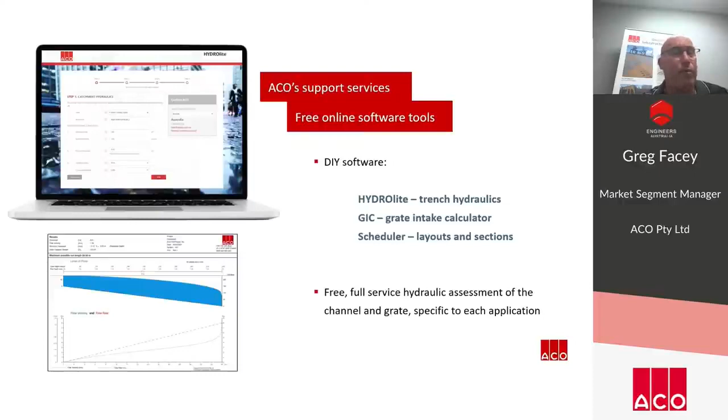Lastly, just to reiterate, we're here to help you across a broad range of projects with all our products. So askaco.com.au is how we capture all the services that we offer. You can head into this site to access the channel hydraulic service, grate intake calculator, and design request forms, and so on. Our website also contains a lot of information and downloads to assist you with your next project. Thank you very much for listening today, and I look forward to your questions.